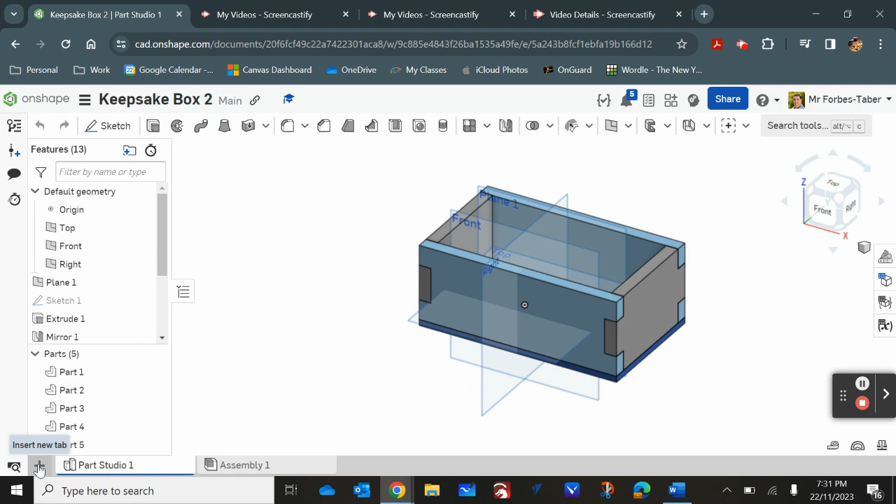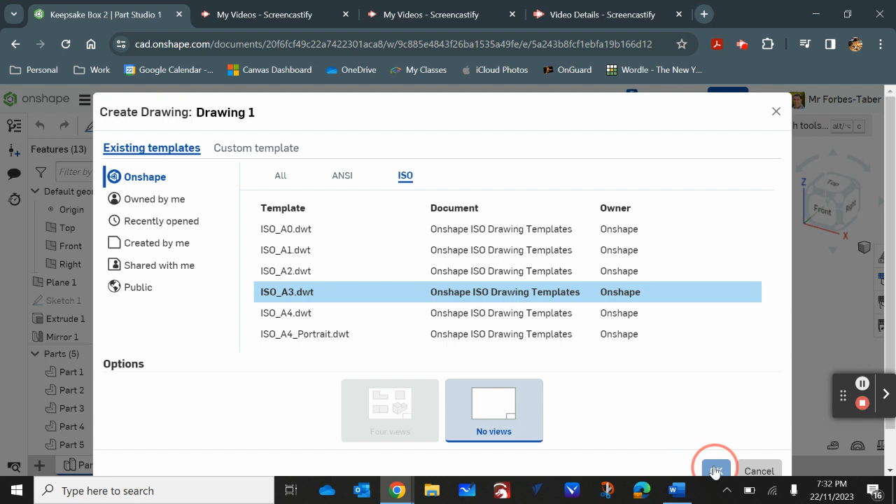So we go over here to insert a new tab, click on the plus symbol, and go to create drawing. We want any template that has millimeters in it. If we go to all OnShape templates, there are lots of them, and it doesn't matter which one we use really, as long as it's in millimeters. These ISO templates are the international standard templates, and I like them because they're always in millimeters too. I'm going to pick an A3 drawing paper template. Click OK - as long as it's in millimeters, it's fine.

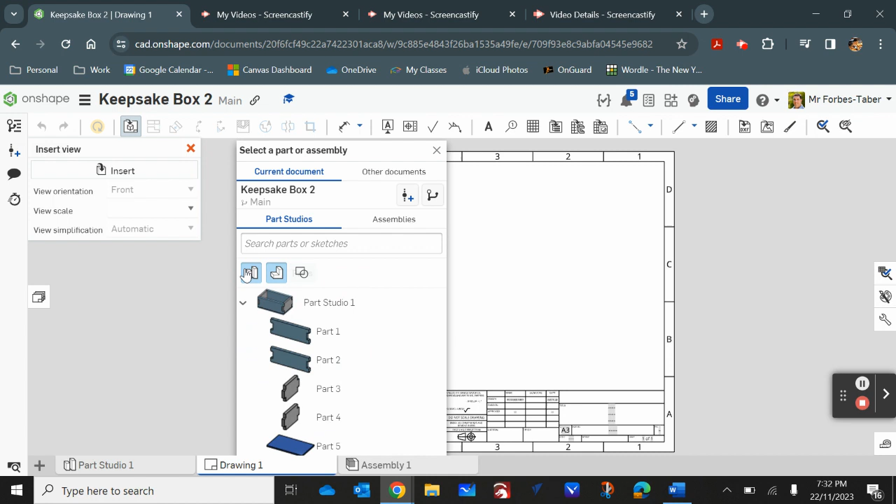Now that's going to bring up a page and automatically choose that you're ready to insert a view. If you click over here on Part Studios, it'll show the whole job. If you only click on here, you'll only see the parts. See? So if you highlight that one, you'll see the whole job. We want to click on the whole job because that's the view we want to put in.

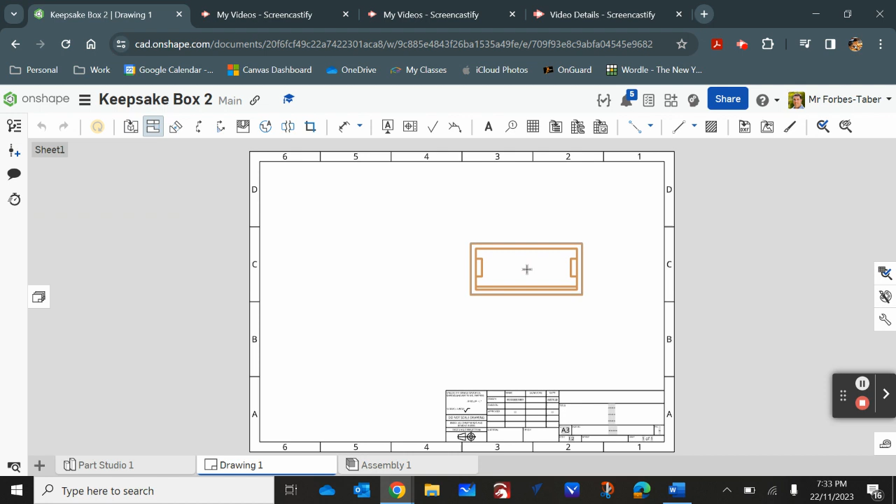Now over here it says front view, so we're putting the front view in first. I'll put the front view over here somewhere. Moving your mouse or your finger on the trackpad, click to place the view. If you move away, it's hovering there asking if you want to place another view in this orthographic drawing. So if you click again, it'll place another view. Now we've got the top view and the front view.

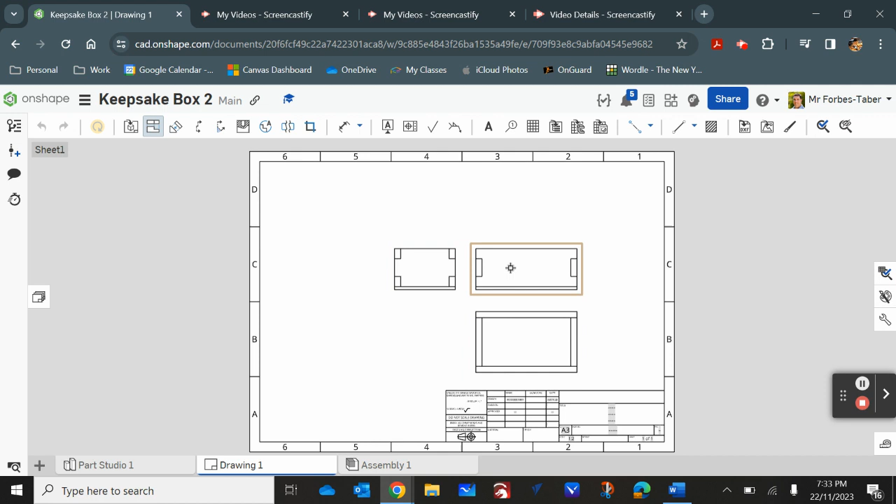Now if I click on that view again and move to the side this time, it'll put in the end view, because that's our side. Now what's this? If I click on this view again and hover down this way, it'll put in an isometric view for me. So within the space of about 4 clicks, we've created pretty much our orthographic drawing of our project that might have taken a long time using pencil and paper.

The other thing is it's perfectly accurate, so we can dimension this or put sizes on it very accurately and very quickly. So let's have a look at how we do that.

If you want to move these around, you can click off this projected view. You can actually move this and watch what happens - this lines up again. So if I move this, this lines up again. So orthographic drawings are aligned at 90 degrees. If you move one of the views, it moves for you, which is really cool.

Now we could put labels on here. So we could go to this note here and put a note over here and say, well, this is the end view. Now, if we want to make that a bit bigger because it's a bit smaller, we can highlight that.

We can say, well, let's change that from 3.5 millimeters high to say 8 millimeters high. So then we can draw another one over here and say this time we want 8 millimeters high. We might say side, tick. And we'll put a label under this one, and this one should be the top view because we're looking at the top view. So top and tick.

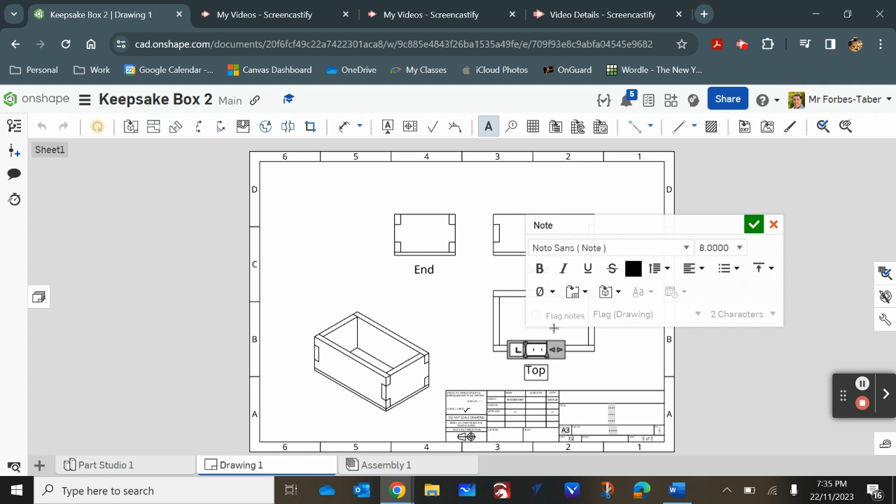So we've just put some annotations on our drawing, which is great. If you click off this so that you can select these, you can move these around if you're not happy with where they're at, but I'm pretty happy with where they're at there, that's fine.

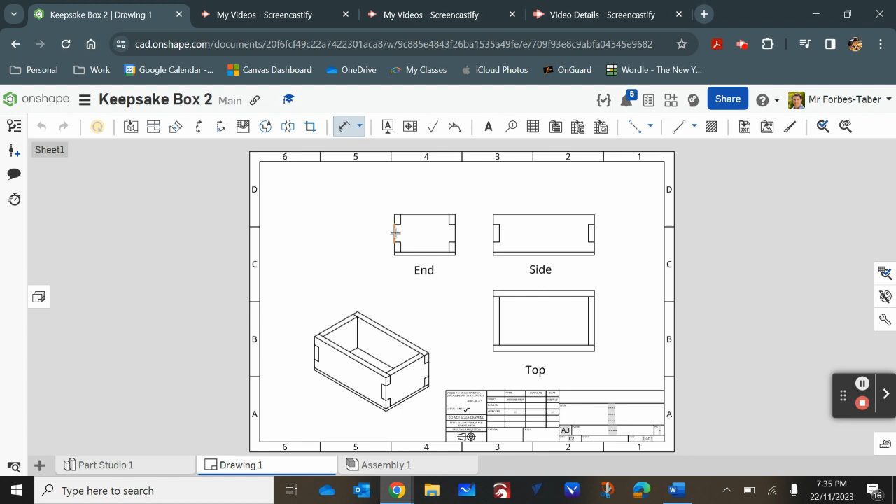Okay, so now we're going to have a look at dimensions. These two arrows up here, or D on your keyboard, is your dimension shortcut. If you click on there and hover over lines, so click and then move and click again, you can place a dimension automatically. So if I hover over this line and move again, I can place a dimension there. And if I move again, I can place a dimension there.

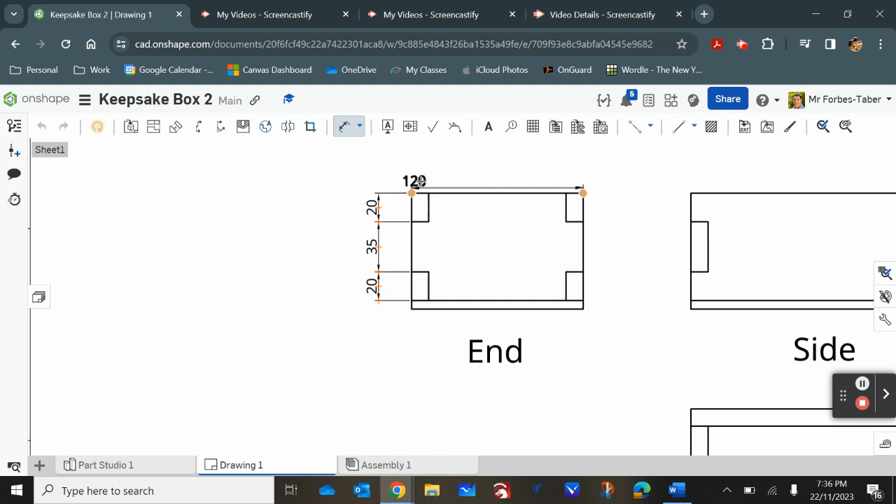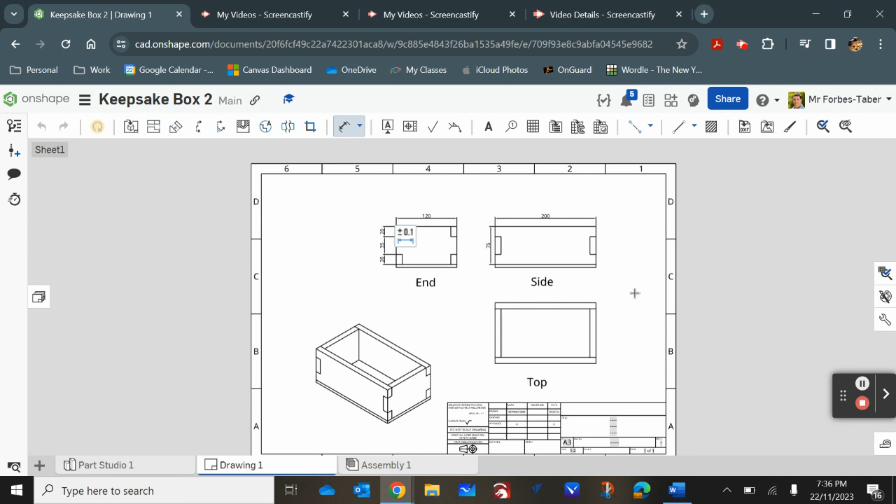Now, if I want to dimension from corner to corner, I can click on a corner, click on another corner, and move away from the drawing and click to place my dimensions. So I love the simplicity of this dimensioning in OnShape. And if you've created a pretty accurate 3D model, then you can dimension these things very quickly.

Now, the rule with dimensions is that you have enough dimensions on there for you to make it, so you shouldn't have to guess what any size is. So I haven't got the size for this base here, so let's put a dimension over here at 6. And I haven't got the width or thickness of this material here, so let's put a dimension between those lines there and between these lines here. So that's all the dimensions I need to create my project.

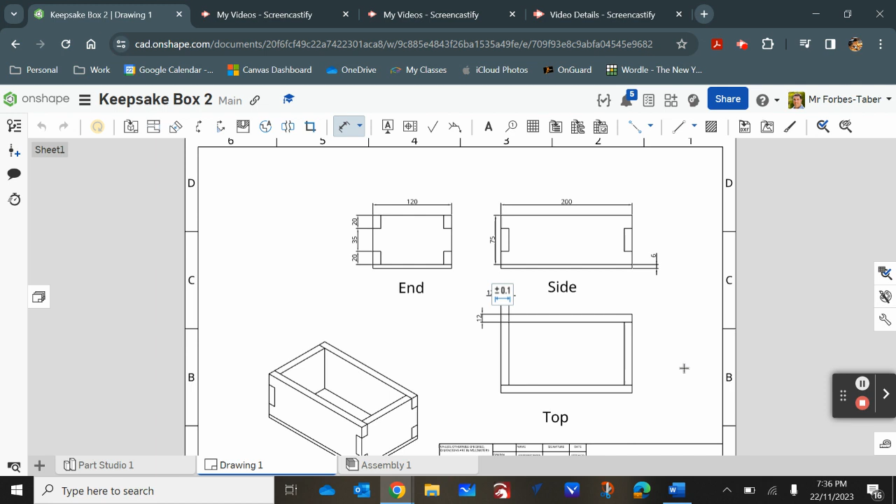And that's a really simple way of creating orthographic drawings in OnShape once you've created a 3D model.